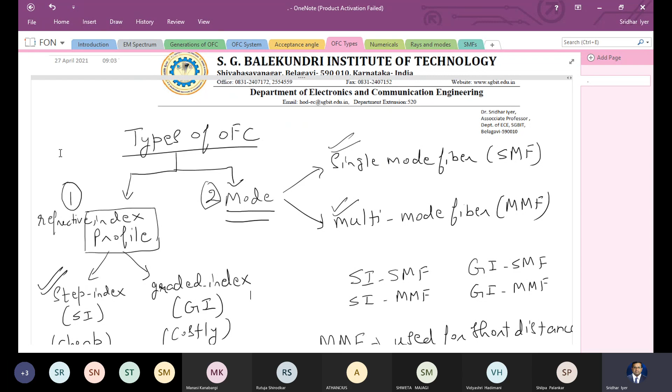We've been able to differentiate between types of optical fiber cables based on refractive index profile, so you have step index and graded index fibers, and based on mode, single mode and multi-mode fiber. We have discussed the advantages and disadvantages of each.

Then we solved some numericals yesterday on different parameters like NA, critical angle, and acceptance angle of the fiber. So all of that is available.

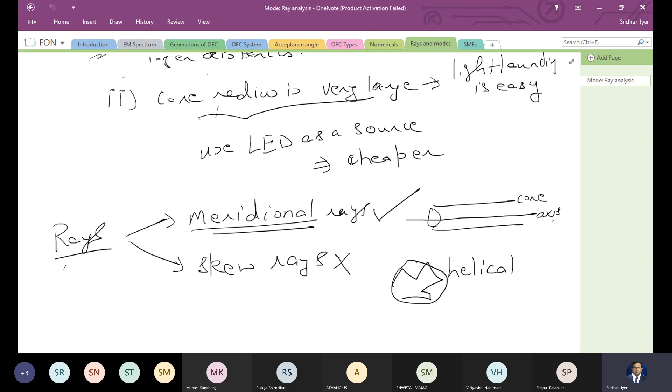Lastly, we discussed the idea of mode and rays. The rays we are dealing with in this course are known as meridional rays, called so because they pass through the axis or center of the fiber, in comparison to skew rays which are helical in nature. So it's always the meridional rays we are dealing with.

The aim now is to talk about the kind of fiber used a lot in current systems, the single mode fiber. But before going into it, we need some build-up so we can actually understand what this single mode fiber is made up of and how it functions.

So this build-up will take us into the types of fibers which we have discussed, but a little more in detail, and then we'll be in a position to really understand what this single mode fiber is.

We have already discussed yesterday what a mode is. The mode is nothing but a set of guided electromagnetic field patterns. I want to discuss more in detail what this implies, what this set of guided electromagnetic field patterns is.

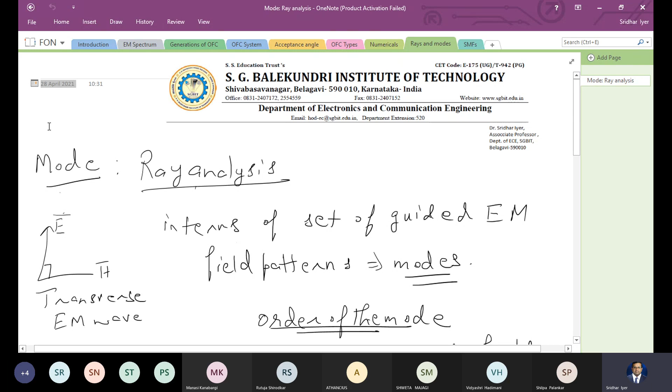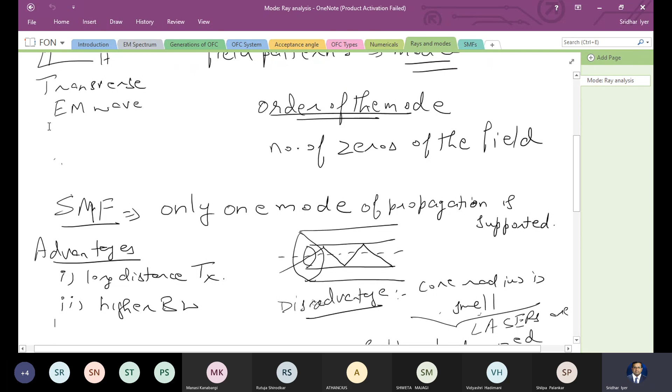And also what is the order of the mode. We've defined it as the number of zeros in the field, but we need to understand in detail what exactly this means. Once we understand this, we'll be able to understand what this 'one mode' in single mode fiber actually means.

So we'll quickly recap a few aspects we've already discussed, then go a bit more in detail regarding types of fibers. That is the aim today, and then we'll move into the details of single mode fiber.

Please note we are discussing single mode fiber in detail because it is the fiber used a lot, as it is a little cheaper and can be used for longer distances, as long as 2000 to 3000 kilometers. So let us quickly look at the types of fibers in detail.

Let us look at the step index fiber, SI. We've already drawn this, but I'll redraw it for completeness. So from a side-on view, this is the core of the fiber, and this is the cladding of the fiber.

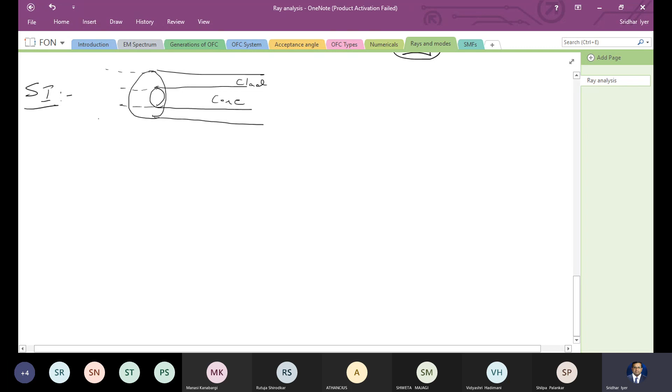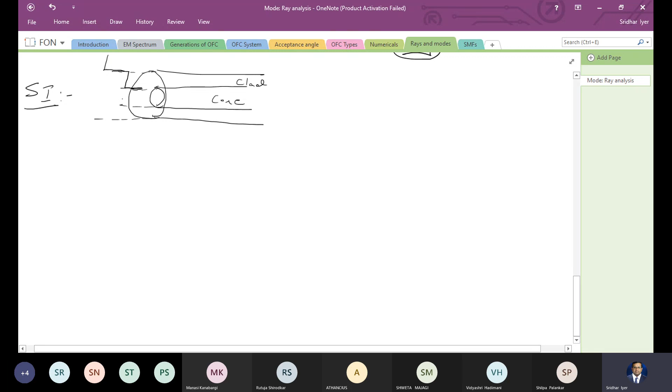In a step index fiber, as we move from the cladding towards the core, there is an abrupt change in the refractive index. It stays the same inside the core, and once you move back to the cladding, it changes again. This distance of the core is the diameter of the core, which we call 2a; in some books it may also be called 2r.

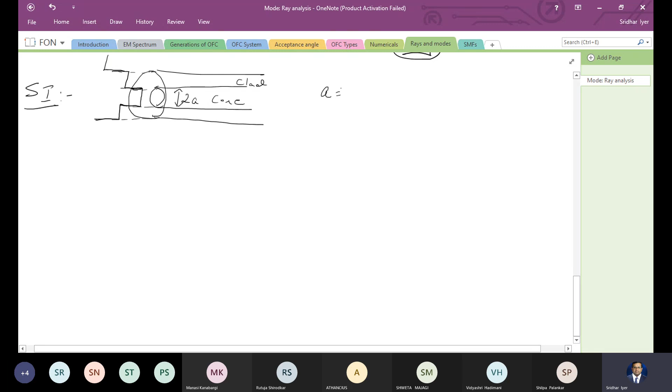I'm going to call it 2a, where a is the radius of the core, hence 2a will be the diameter. And I am calling r as the refractive index profile. That's why I'm not calling r the radius. In some books they call r the radius of the core and use another symbol for refractive index profile, but we'll stick to this.

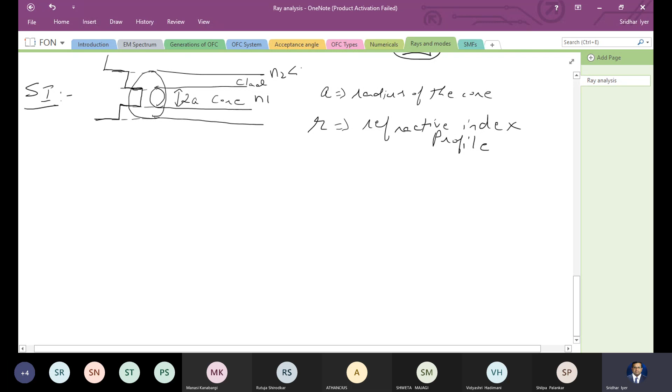So you have a as the radius of the core, and the core has a refractive index n1, and the cladding has a refractive index n2, which for us has always been less than n1. So n1 and n2 are the refractive indices.

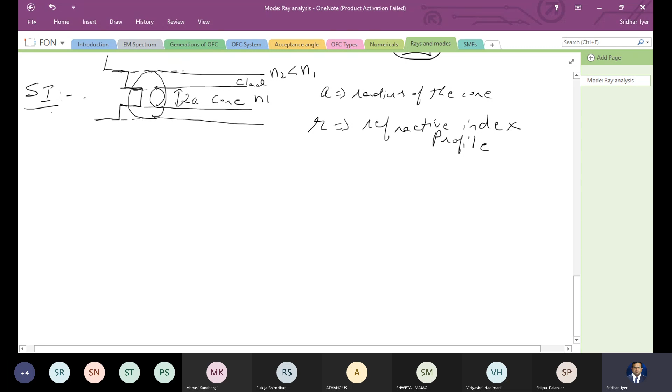If I draw the profile with an axis here, viewed as a graph, the y-axis is the refractive index. I'll call this n of r, and the x-axis will be the distance, r. This is known as the refractive index profile.

So the refractive index profile for a step index fiber, n of r, is n1 if you are in the core, for r between 0 and a, and it is n2, the cladding refractive index, once r exceeds the radius of the core. Then you have the graded index fiber.

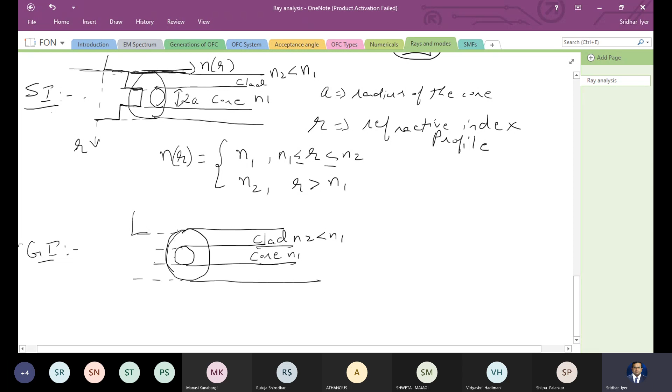Let me redraw the diagram for a graded index fiber. Let this be the core, let this be the cladding. The core has refractive index n1, the cladding has refractive index n2, which is less than n1. Here, once you move from the cladding towards the core, there is no abrupt change in the refractive index. Rather, there is a gradual increase, then a gradual decrease, and then you come back to the cladding. So you can see the difference between the step index and the graded index fiber.

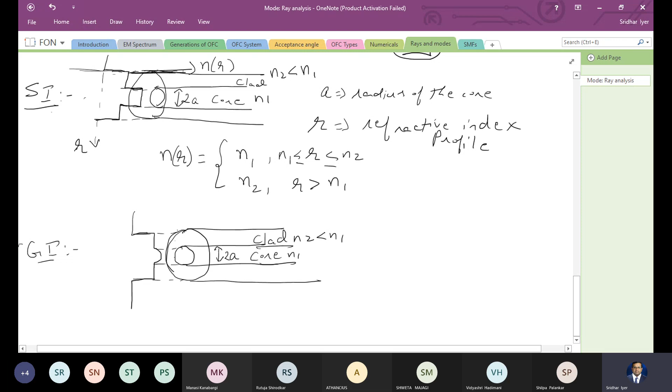Again this is 2a, the diameter, and you have the y-axis and x-axis, which is the distance, the profile n of r versus distance. For this graded index fiber, the refractive index profile n of r is defined as follows. It was easy to define this for the step index fiber because there is just an abrupt change.

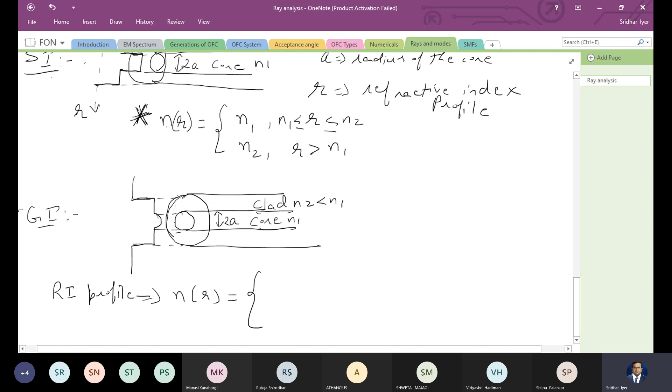From the cladding to the core there was an abrupt change, so the value is either n1 for a certain distance, or n2 if the distance increases beyond that. But that is not the case for the graded index fiber, because there is a gradual increase, then a slight constant region, and then a gradual decrease.

This makes the mathematics for the graded index fiber profile a little complicated, and it's given as n1 times the square root of 1 minus 2 delta times (r divided by a) raised to alpha, where delta is the index difference and a is the radius. I'll define alpha in a moment. This applies if r is between 0 and a.

And you have n1 times the square root of 1 minus 2 delta if r is greater than a. So this is the cladding, and the top portion is your core. I gave some confusion there in terms of the step index fiber, so let me correct that: n1 applies between 0, r and a, and the other case is for r greater than a. But I had explained what the idea is.

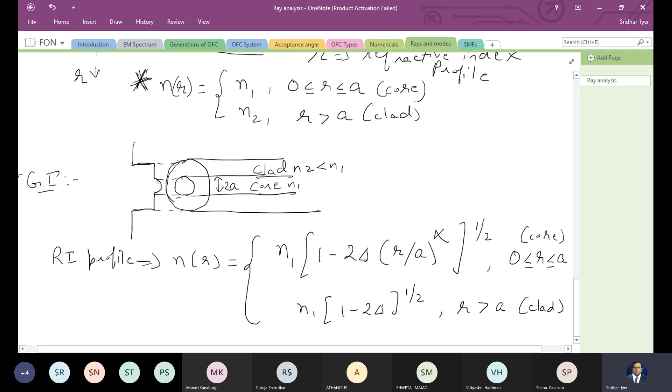Now the graded index fiber profile looks a little complicated, and it can be derived. However, what is important here is to note two things. One is delta, which we have already defined, the relative index difference, n1 minus n2 divided by n1, which we have also used in solving numericals. So r is the distance, a is the core radius.

So what is this distance r? R is basically the distance measured from the center of the core. Let us define r for completeness: r is the distance measured from the center of the core, along the radius. That is the distance there.

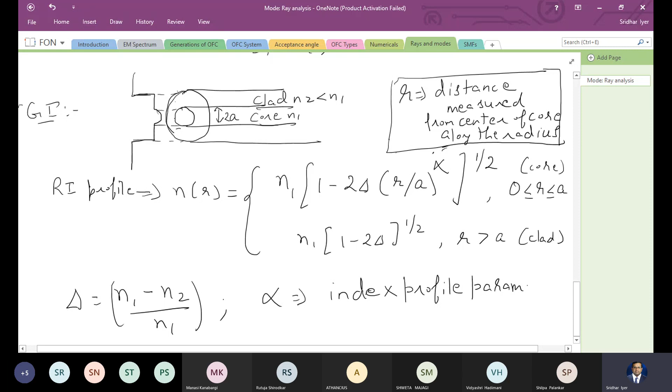Now the other parameter which needs to be defined is this term called alpha, known as the index profile parameter. Like I was saying, you can derive the equation for the refractive index profile. We can do the derivation, but that is beyond the scope of the syllabus. We'll have to recollect this equation. As such, it is not that useful for solving numericals, but there are certain numericals where we have to find the value of alpha, so we'll solve such kind of numericals and you'll understand better.

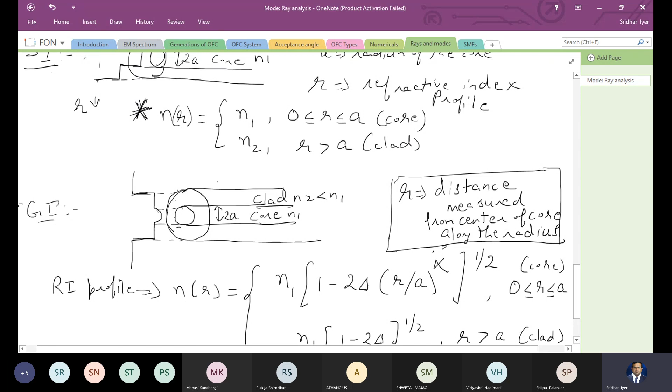Now this alpha is very important, because if you look at the equation for the refractive index profile, if we substitute alpha as infinity in that equation, your 2 delta R by A raised to infinity will just become 0, and you'll only be left with N1.

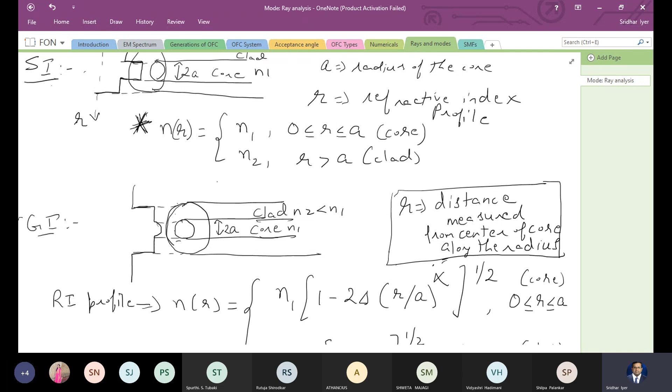Which implies that when alpha is infinity, the graded index profile turns out to be a step index profile, because in the step index profile you just have N1 between R less than A, between 0 and A. So let me write this for more clarity, so you keep looking at the equation so you're able to understand. If alpha becomes infinity, the equation for n of R becomes just N1. Why? Because the term in the bracket, 1 minus 2 delta R by A raised to alpha, will become 1 minus 0, which will just be 1.

So you have N1 between 0, R and A, and then you just have N2 again, and N1 again here, and this implies that it is the cladding. So for alpha equal to infinity, graded index profile is equal to a step index profile. There are ways to make this alpha as infinity. If alpha is equal to 1, the profile is triangular, and when alpha is equal to 2, the profile is parabolic.

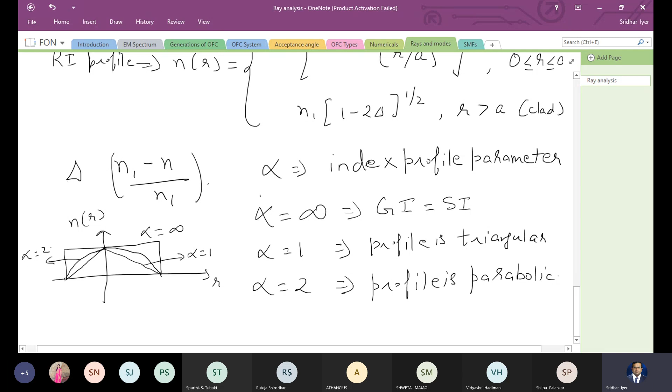So how does this look on a graph? On a graph it looks like this - you have n of R here, and R here. So when alpha is infinity, the profile looks like this. When alpha is 1, the profile is triangular - it looks like that. For alpha equal to 2, the profile is parabolic, so the profile looks like that. This is alpha equal to 2. So this is what happens to the profile.

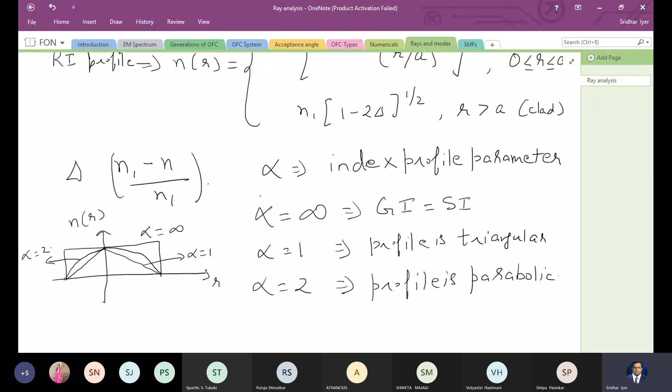So a little more detail on the step index and graded index fibers. The reason why we are doing that is because the single mode and multi-mode fibers could be step index single mode fibers, or graded index single mode fiber, or step index multi-mode fiber, or graded index multi-mode fiber. So this is a little more detail about the step index and graded index fibers.

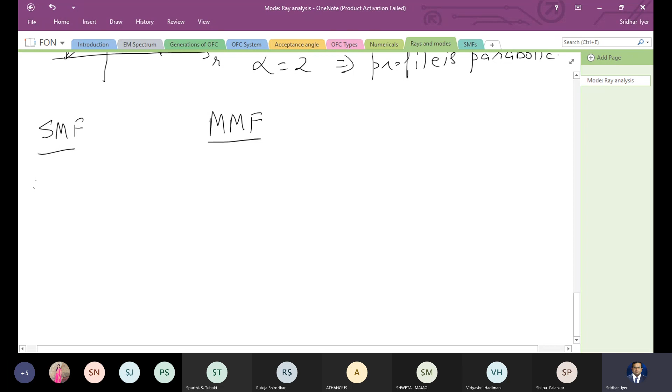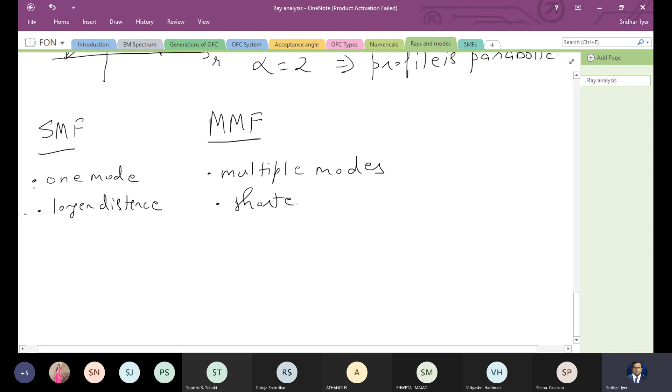Now let's look at a little more detail on the fiber types based on the modes. So we have two types that we discussed yesterday - one is the single mode fiber and the other is the multi-mode fiber. In the single mode fiber, you have only one mode. In the multi-mode fiber, you have multiple modes. This can be used for longer distance. This is used for shorter distance, and I also told you the reason for that.

The reason is, since it has multiple modes, the modes start to interfere with each other. It is like crosstalk, and the reason for use of multimode fibers for shorter distance is because the intermodal dispersion or the intermodal crosstalk is high. We'll discuss this in module 2. What is this intermodal dispersion? In short, it is also known as IMD. For now, since it has multiple modes, these modes are going to start to interfere with each other, and the dispersion is high, and this increases as the distance increases. So we'll establish that relation also. That's why multimode fibers are used only for shorter distance.

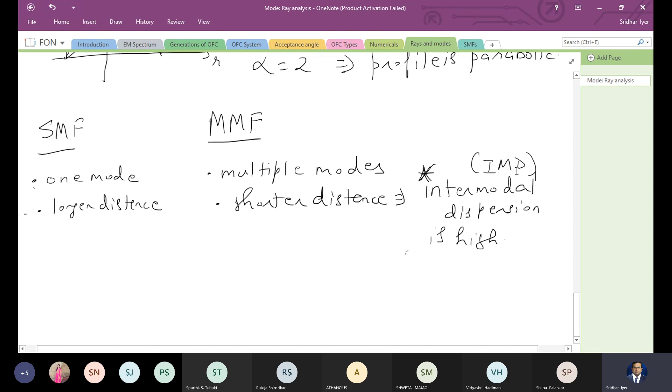The other advantage of a single mode fiber is you get higher bandwidth. This multimode fiber also provides higher bandwidth, but for shorter distance.

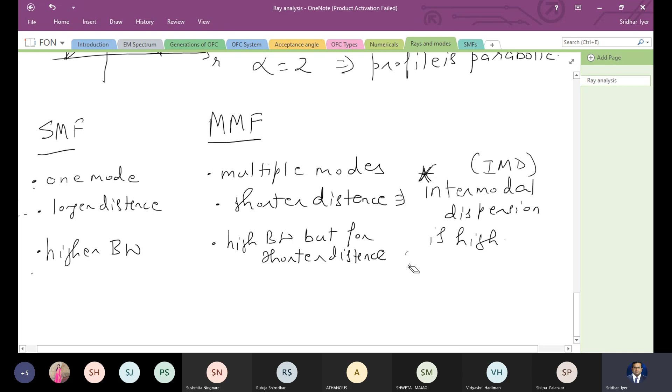In fact, currently the multimode fibers provide much higher bandwidth than single mode fiber for distances about 1 kilometer. So in office environments, in shorter distance, you must prefer the multimode fibers, right?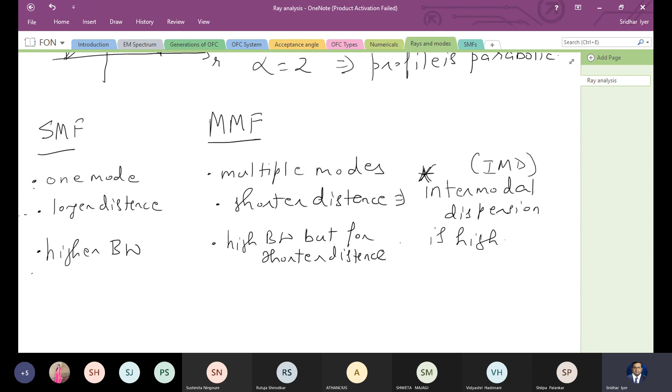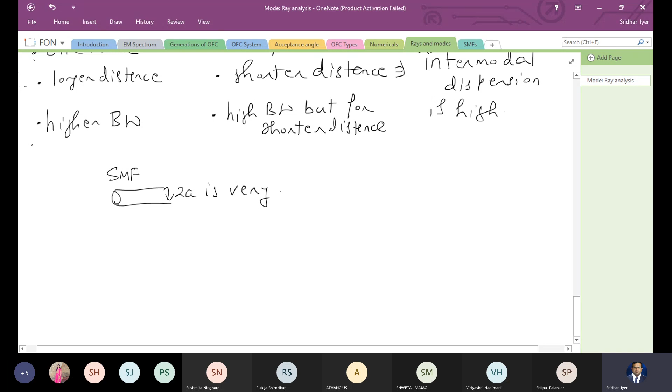So the other aspect when it comes to single mode and multimode fiber is this. For a single mode fiber, the core radius, that is this diameter, let's say 2a, right? For a single mode fiber, this 2a is very small. That means radius is very small, hence diameter is very small. What is the implication of this?

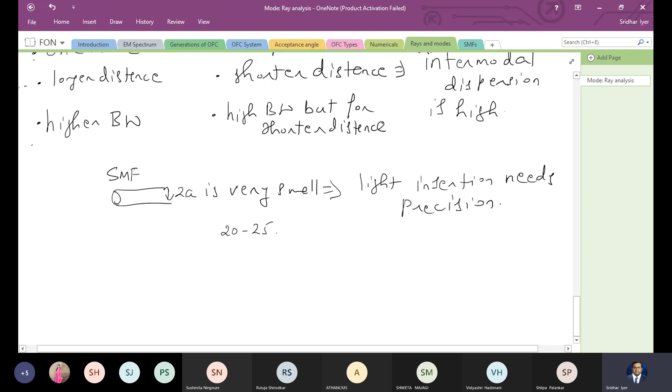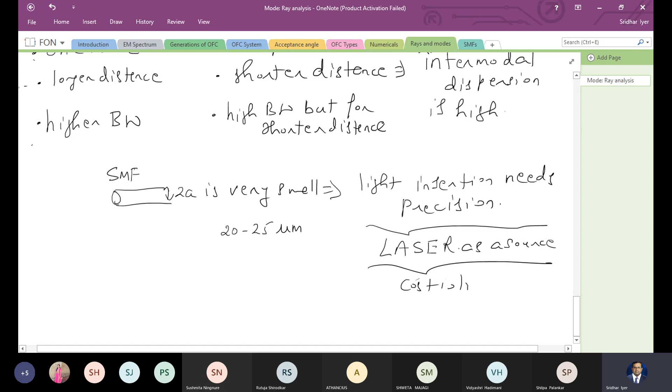The implication is light insertion needs precision. Because the radius is very small, diameter is very small, you need to be very precise in inserting light into the single mode fiber. So just to give you a glimpse of what happens in the single mode fiber, the diameter of the core is very small. It could be as small as about 20 to 25 micrometer. It's a very small radius, and therefore you need a lot of precision, and hence the result is you always need to use a laser as a source, and the result of that is cost is high because lasers are costlier, right?

But I mentioned to you, since the bandwidth is very high and the distance of transmission also becomes very large, we prefer the SMF. But for shorter distance, you always prefer the multimode. So when it comes to the multimode fibers, the core radius is large, and you can get them as large as, so let me write this, 2a is large, and you can get them as large as 100 micrometer to about 125 micrometer. So you don't need to be that precise in inserting the light.

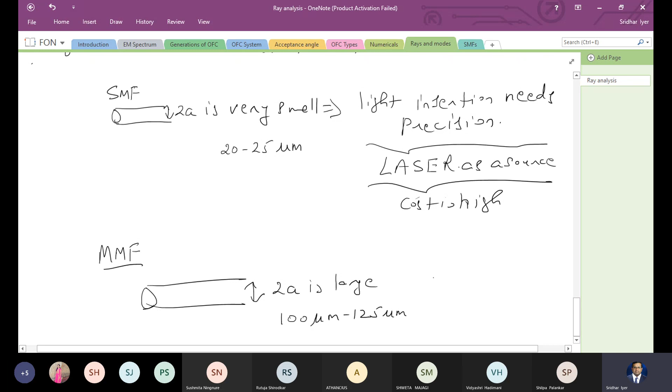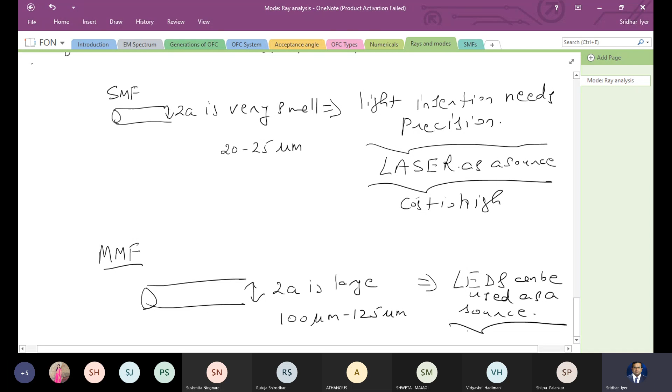Therefore, LEDs can be used as a source. Therefore, cost is low. So I'm comparing them, that's why I say cost is low. So cost is lower than that of the single mode fiber. So this is the advantage disadvantage that we get when it comes to using the single mode fiber or the multimode fiber.

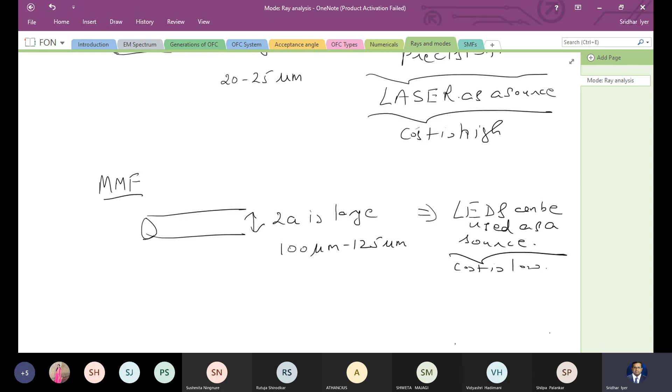So the next aspect before going into the details of the single mode fiber is to understand the details of this mode. So let's look at that. We have already defined what this mode is, right? So let me rewrite again. It is a set of transverse

electromagnetic fields. What is this word transverse? Transverse basically implies orthogonal. So the EM fields, the electric and the magnetic fields, this is E bar and this is H bar, they will always be at 90 degree with each other. That is what the mode is.

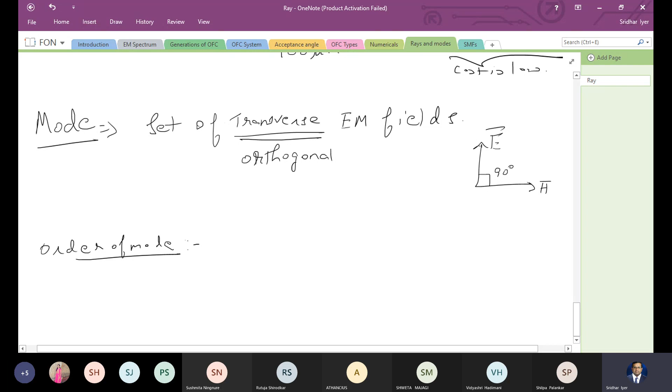So what exactly does it help us with? We should also know what is the order of the mode. We have already defined this. Now we are going to see the details of this. So the order of the mode is the number of fields becoming zeros across the guide. Guide here means the optical fiber cable because it is guiding the light.

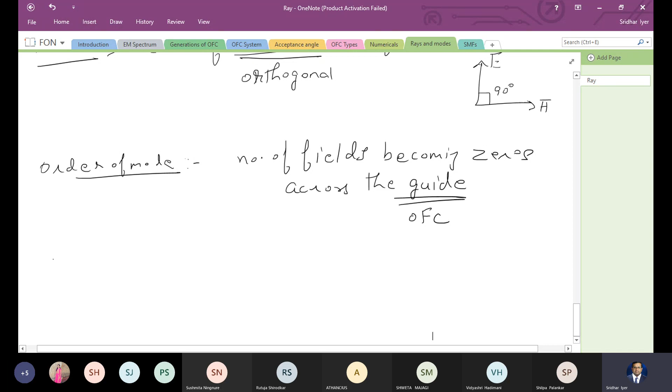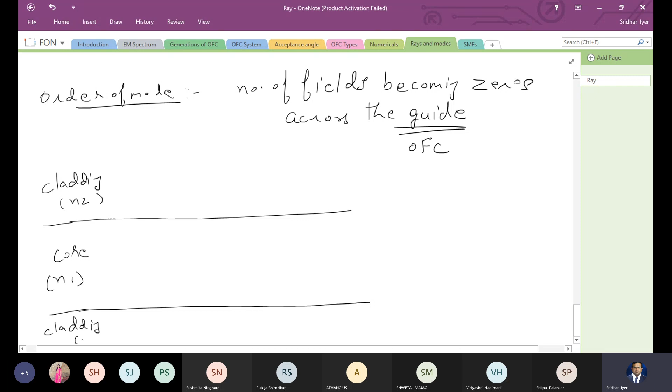Now let's try to understand what this zeros mean. So let me draw this diagram, and this will help you in understanding what this mode is and what this order of the mode is. So let us take the example of an optical fiber which looks like this. So you have the core, which is N1. You have the cladding, which has refractive index N2, and I'm not writing it, but N2 is less than N1. And likewise, you have the cladding here as well, which will have a refractive index N2. Right?

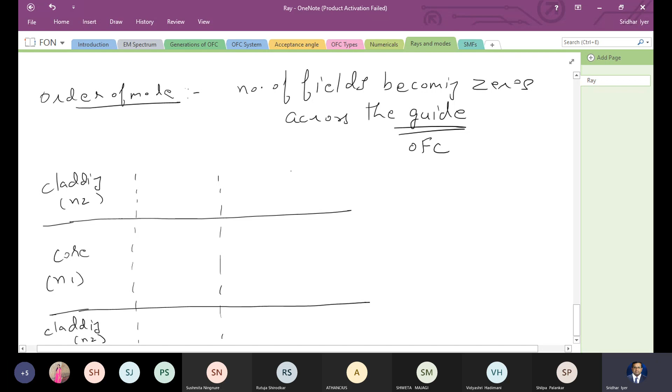Now, the fields mean this. Since we are saying that these are transverse electromagnetic fields or electromagnetic rays, you can write them as TE, transverse electromagnetic. TE stands for transverse electromagnetic. And if the order of the mode is zero, now, how are we defining the mode? The order of the mode is number of fields, fields can be electric and magnetic fields, becoming zero across the guide.

So if TE0, the subscript zero means the fields do not become zero at all. That means the fields would look something like this. So if the ray is in the cladding, the moment it comes to the core, it is propagating and then it goes back in the cladding.

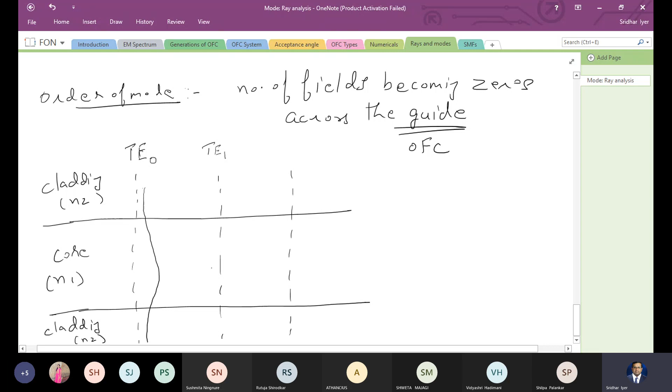So you can see here that the field does not become zero. If that is not understood, you can understand this concept of zero through TE1. TE1 implies that there is 1 zero for this ray. So the ray looks like this. Once it comes from cladding, it goes inside the core. Now it passes zero or becomes zero, and then it goes back into the cladding. So you can see here, this point makes a zero.

So TE1 is a transverse electromagnetic wave, or the mode which has 1 zero, right? Likewise, if we have TE2, it implies that there are 2 zeros. The mode comes from the cladding, goes inside the core, makes 1 zero, makes another zero, and goes back inside the cladding. So this is 1 zero here, and this is another zero. That's why it is called TE2. So the number of these fields becoming zero across the guide, that will be the mode of the fiber, right?

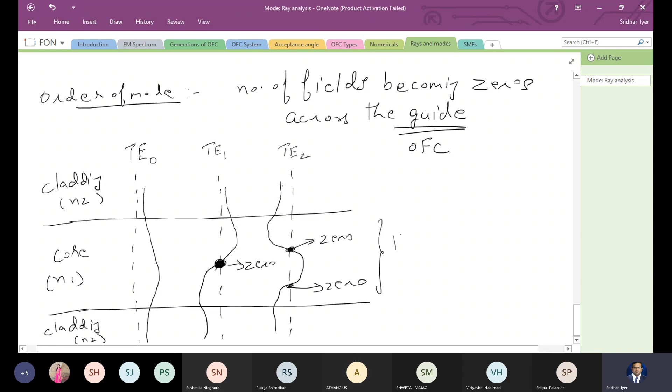So now from here we can define some of the terms which we should already be aware of. So this part here is harmonic variation. It is harmonic because this part of the ray, that is the ray before becoming zero...

Is the screen visible, any of you? No, sir. Okay, hold on, I think OneNote just crashed. One second, okay, let me put this back. Okay, I think now it should be visible. Yes, sir, okay.

So I was mentioning this is known as the harmonic variation because before becoming the zero, so this part of the mode—I think it's gone bad again, right?

I'll reshare again. Okay, I think it's back. So you are able to see the screen, it's crashing, that's why. Yes, sir, okay.

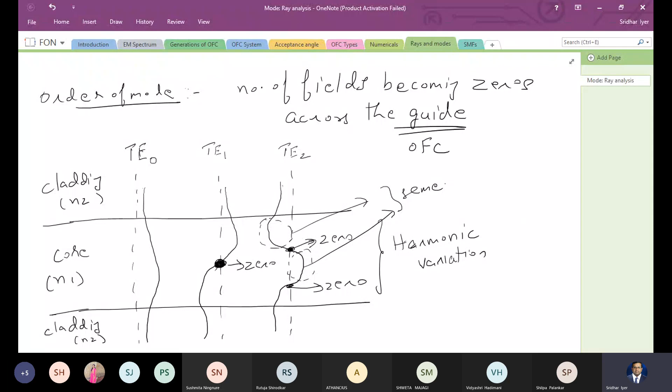So this part of the mode before it becomes zero, and that part of the mode after it crosses the first zero, are the same. That means their structure and their properties are the same. That's why it is known as harmonic, right? So that is the harmonic variation. This is just for your information. This is what the mode would look like. Okay, so we have defined what is the mode and what is the order of the mode.

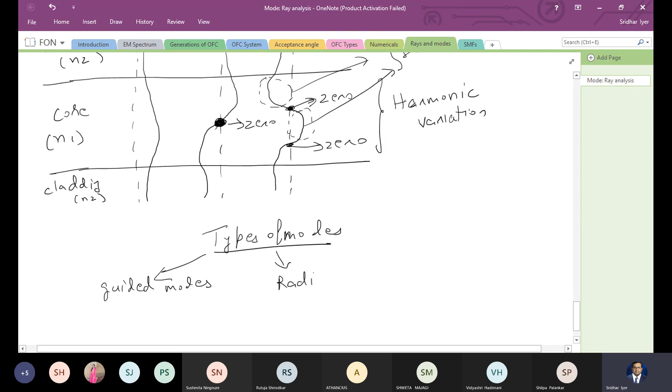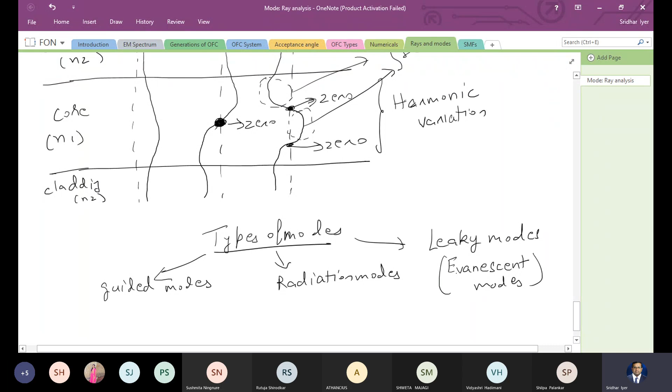Now what is important for us apart from this is to understand types of modes. There are 3 types of modes which occur in an optical fiber. One is known as the guided modes. The second is known as the radiation modes. And the third is known as the leaky modes. These have another name also—in some books you will read these are also known as evanescent modes. Evanescence in English means it's fading, right? That's why they are called leaky modes.

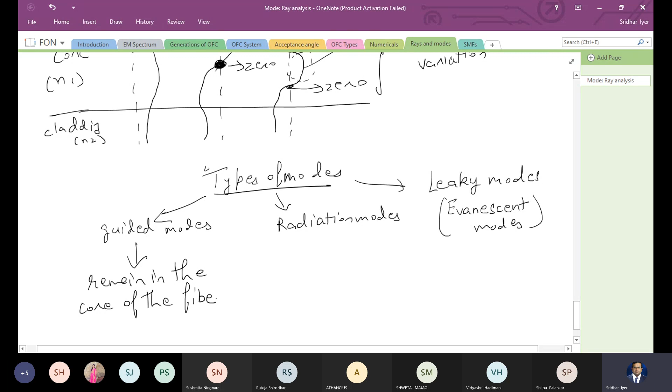Okay, so what are these guided modes? These guided modes are the modes which are of interest to us. These guided modes remain in the core of the fiber, and they remain in the core of the fiber—usually the lowest order modes remain at the center of the core, right? The lowest order modes, okay.

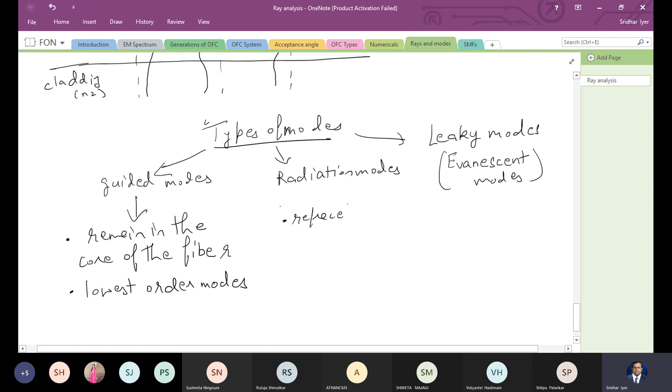Now, what about these radiation modes? So when light is launched into the fiber, and the angle becomes greater than the acceptance angle, some light is going to be refracted outside the core into the cladding. So these refracted rays, due to the angle of incidence becoming greater than the acceptance angle, these kinds of refracted rays are known as the radiation rays or radiation modes. Okay, so these are the refracted rays into the cladding. They lead to power loss. Why? Because they are refracted rays and they always propagate in the cladding.

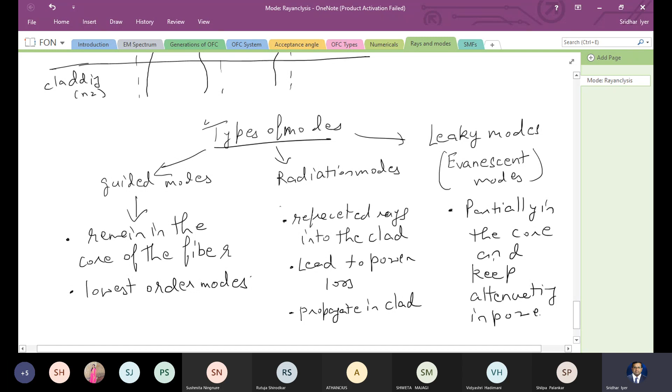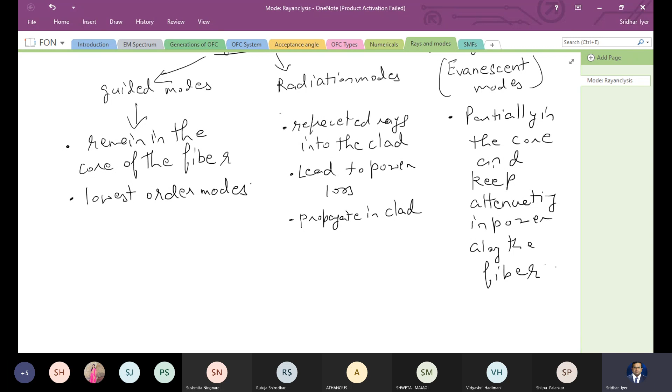Okay, now what about the leaky modes? The leaky modes are partially in the core and keep attenuating or decreasing in power along the fiber. So they are partially in the core, but as you move along the fiber, these start to attenuate in power, right? So radiation modes and leaky modes are not of any interest to us. In the fiber, it should never happen that you have radiation modes and leaky modes. Ideally, you must always have guided modes because these remain inside the core of the fiber, but that does not always happen. You are always going to have some radiation modes and leaky modes, and there are ways to reduce them.

However, in general, maximum power and maximum of the modes are always going to be the guided modes. We are really not interested in having light being the radiation mode or the leaky mode. We always want the light to be only the guided mode.

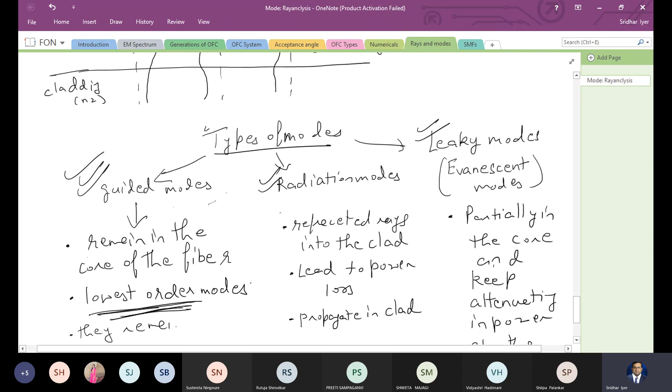Important to note from the guided mode definition: they remain in the core of the fiber, and these are the lowest order modes. Further, they remain at the center of the core of the fiber.

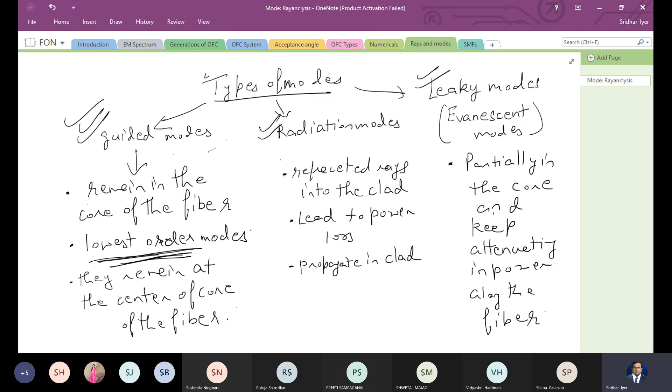So, for propagation of light, I must always prefer the guided modes because they are closest to the core, closest to the axis of the fiber, and this is the basis of finding or making the single mode fiber. If I am able to have this single mode fiber with guided modes, then I can say that the light is always going to be at the center of the fiber.

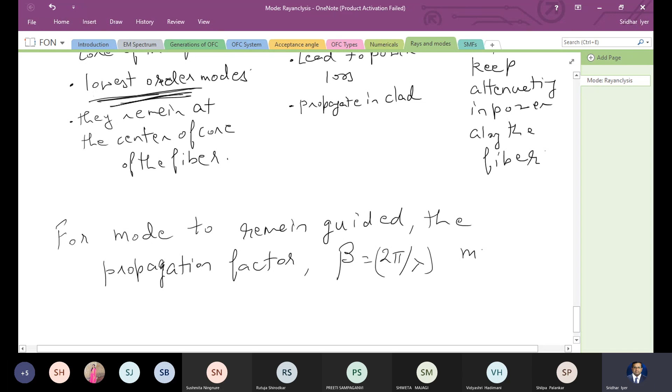Now there are conditions for this guided mode. For a mode to remain guided, the propagation factor, termed beta... sorry, beta is not 2 pi by lambda. For the mode to remain guided, the propagation factor beta must follow: n2k less than beta less than n1k, where k is 2 pi by lambda.

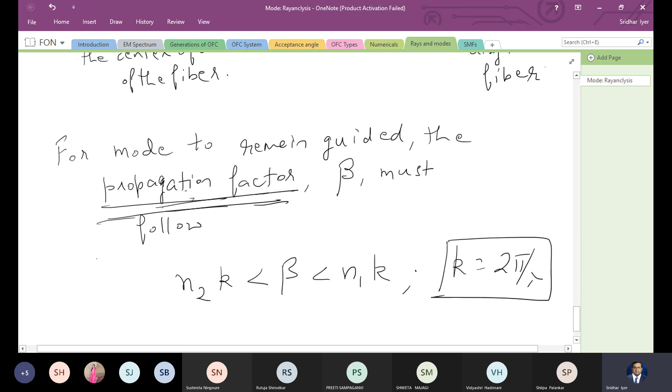So there is something known as the propagation factor, which we'll look at in more detail in module 2. This beta must follow the relation n2k less than beta less than n1k, where k is a constant defined as 2 pi by lambda, and lambda is the wavelength. If beta is between n2k and n1k, then we can say that the light is guided, that is, the mode is guided. This is important.

This relation helps us in the numericals as well, and it will help us in understanding dispersion in module 2. I will be deriving this relation of beta being between n2k and n1k in module 2. It is related to phase velocity and group velocity, which we'll be doing in module 2. Right now we only need to know this definition, and this will also be one of the basis of defining a single mode fiber.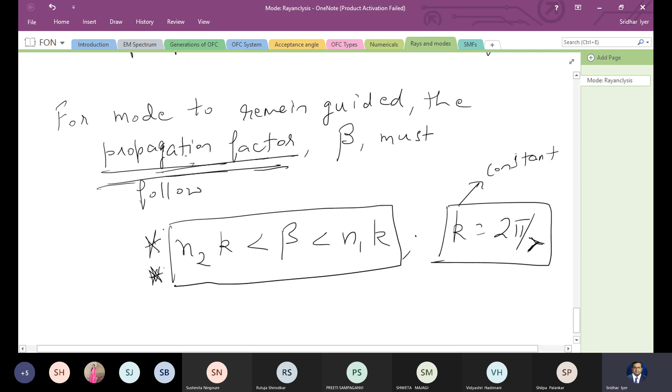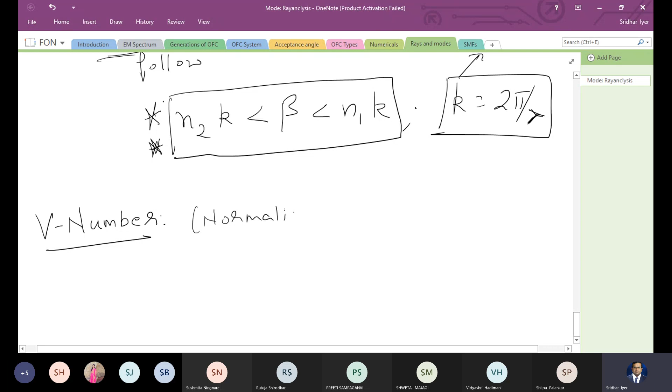So the last part in defining the single mode fiber is what is known as the V number. This is also known as, in some books, the normalized frequency, but we will always be referring to it as the V number. It is an important parameter, and it is connected to what is known as a cutoff condition.

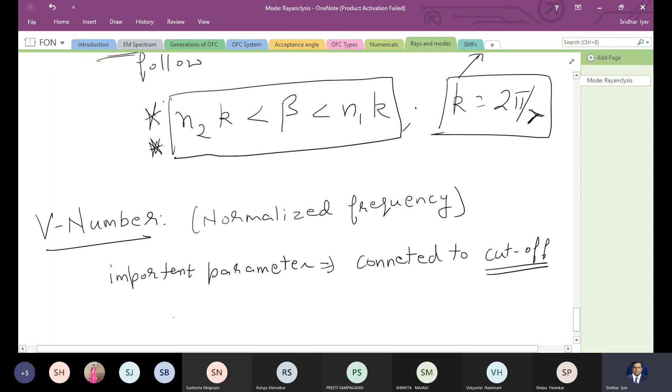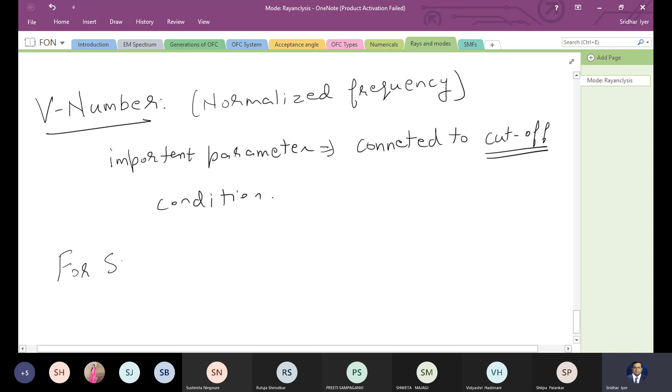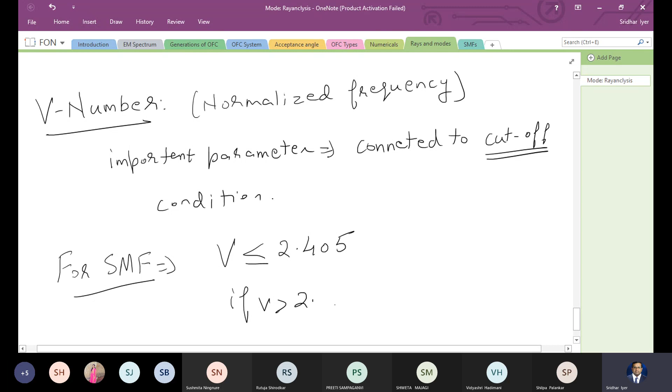Now, from experiments, it has been found that for a fiber to be a single mode fiber, the V number must be less than or equal to 2.405. This is already established; there is nothing to derive here. If V is less than 2.405, you get a single mode fiber. However, if V is greater than 2.405, the fiber is multimode. This is a very important cutoff condition factor for us.

It helps us in solving a lot of numericals, which we'll be doing probably in tomorrow's lecture. Please note, V number is a dimensionless quantity, so there are no units for this V number. It is a quantity which determines the number of modes a fiber can support.

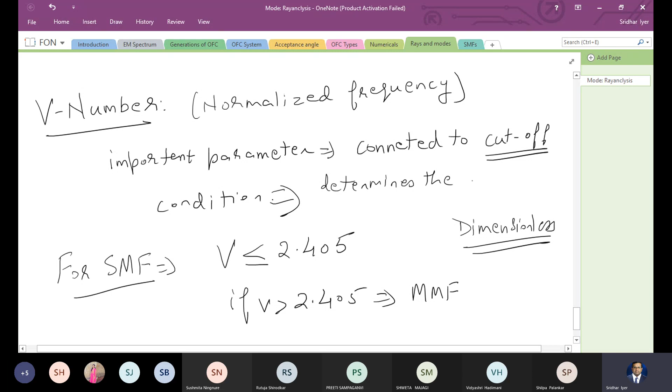So if V is less than 2.405, then you can say that it is a single mode fiber; it is going to support only one mode, else it will support multiple modes. So, V number determines the number of modes a fiber can support.

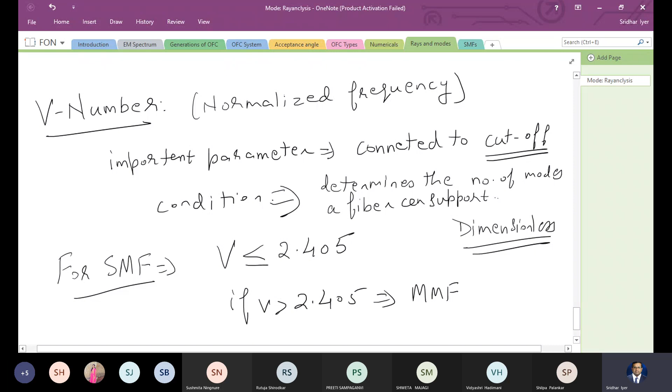So in the numericals, we'll see how to calculate and determine if the fiber is single mode or not. You have to calculate the V number. If it is less than 2.405, you will say it is single mode, else it is a multi-mode fiber, right?

So what is the equation for the V number? Again, this has been derived through experiments, and we will have to recollect this every time we solve a numerical based on V number. It is specified as 2 pi a, where a is the radius of the core. Please have this clear in mind, because many students make mistakes here. A is the radius of the core.

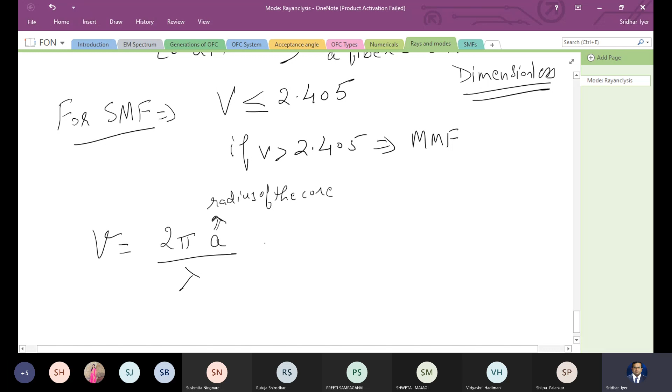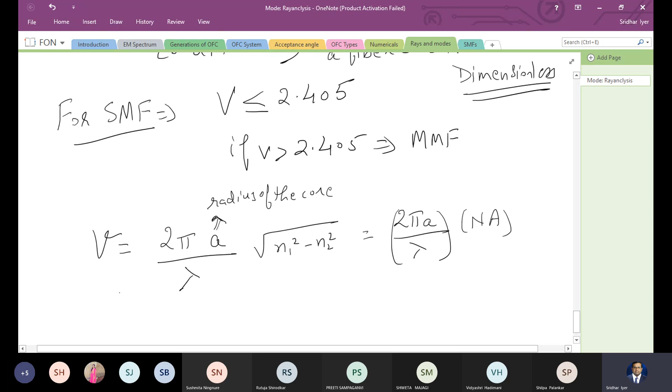So 2 pi a divided by lambda, where lambda is the wavelength of operation, into root of n1 square minus n2 square. You can also write this equation as 2 pi a by lambda, into numerical aperture, since root of n1 square minus n2 square is nothing but numerical aperture. So this is the equation for the V number, a very helpful equation in solving lots of numericals.

If you have a multimode fiber, the number of modes in this fiber can be found using the equation m, which is the number of modes. M is one by 2 into 2 pi a by lambda raised to half, into n1 square minus n2 square.

This entire factor inside the bracket is nothing but V square. Therefore, for a multimode fiber, m is very simply V square by 2. This is important because it helps us find how many modes a multimode fiber can support, and will also help us in solving numericals.

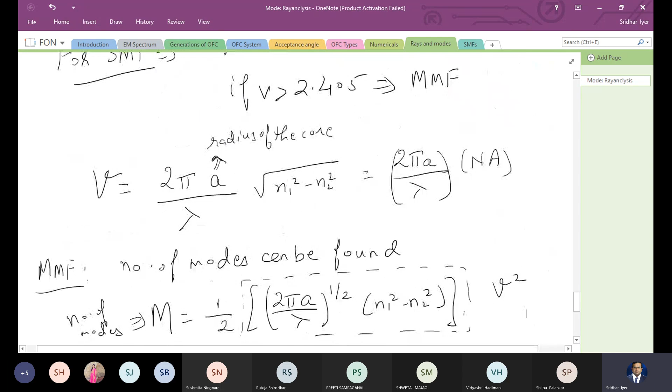So from this normalized frequency, we can calculate one last parameter, known as cutoff wavelength. So we have done the frequency part, now we can do the cutoff wavelength. If I just scroll up, you'll see that the V number has a lambda in the denominator on the right hand side. If we just cross multiply, we can find the cutoff wavelength. So I'm going to use that equation to find it.

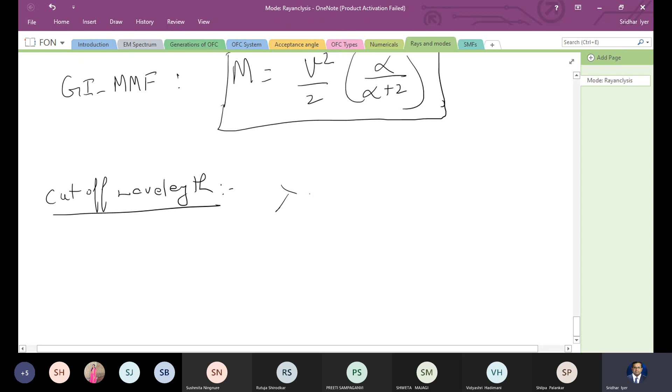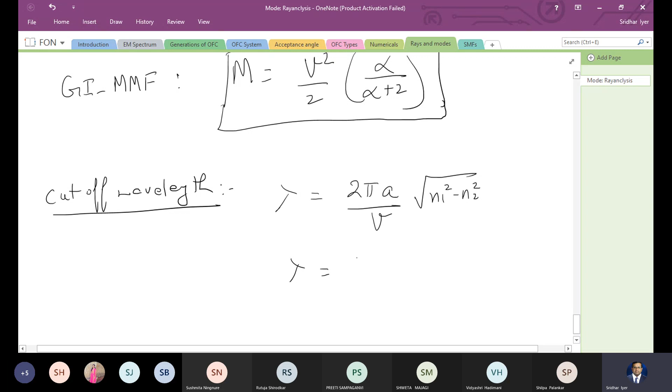So I'm just going to cross multiply. Lambda will be 2 pi a by V, root of n1 square minus n2 square. This factor here, root of n1 square minus n2 square, is numerical aperture, which can also be written as n1 root 2 delta. This we have derived previously. So you have 2 pi a by V multiplied with n1 root 2 delta.

So this is your cutoff wavelength, also specified as lambda c. How do we define the cutoff wavelength? It is the minimum value of wavelength that can be transmitted through the fiber. So this is how we can find the cutoff wavelength.

So there are many numericals which we can solve based on the V number, the cutoff wavelength, and other factors we've just discussed. We'll start solving problems tomorrow, and we are almost towards the end of module 1. A few definitions are left, and a few other concepts and the making of the fiber is left. So after solving the numericals on V number and cutoff wavelength tomorrow, we'll be able to finish this module very soon.